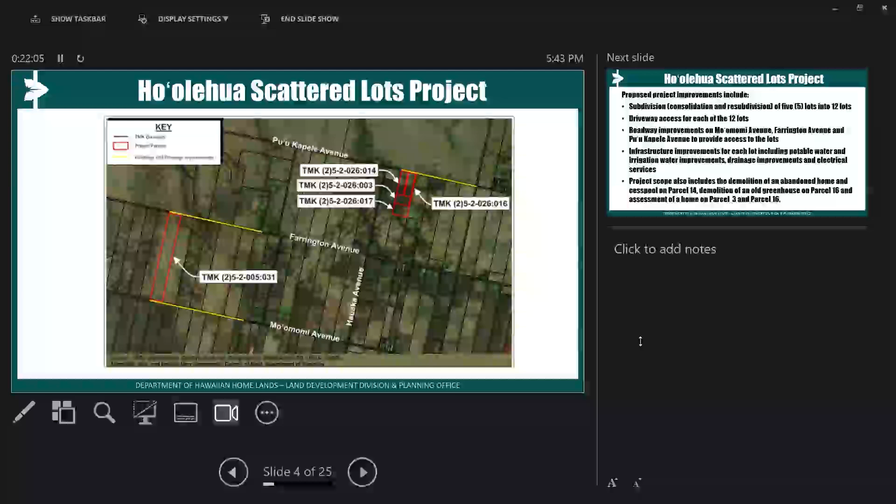Let's go back one to the map. There you go. Yeah, we'll get you handouts and we can also post it to the website. So if you take a picture, we'll make sure we get this posted, you can review it later. All good?

So again, what's included here? We're looking to subdivide the 5 lots into 12. You're going to have driveway access for each of those lots, along with other improvements along the street, really focused on access to the lots. What kind of infrastructure improvements are we talking about? Potable water, irrigation water, drainage, electrical - everything you would need to support a home there.

So again, what's there right now? What already exists? The scope of the project includes demolition of an abandoned home and a cesspool on parcel 14, an old greenhouse on parcel 16, and assessment of a home that's currently on both parcel 3 and parcel 16.

Again, it's a map of what both of those areas are going to look like once subdivided. You guys see that in the back, okay? I see some people taking pictures - again, this will be posted, so you'll have a chance to look at it in greater detail. Okay, next slide.

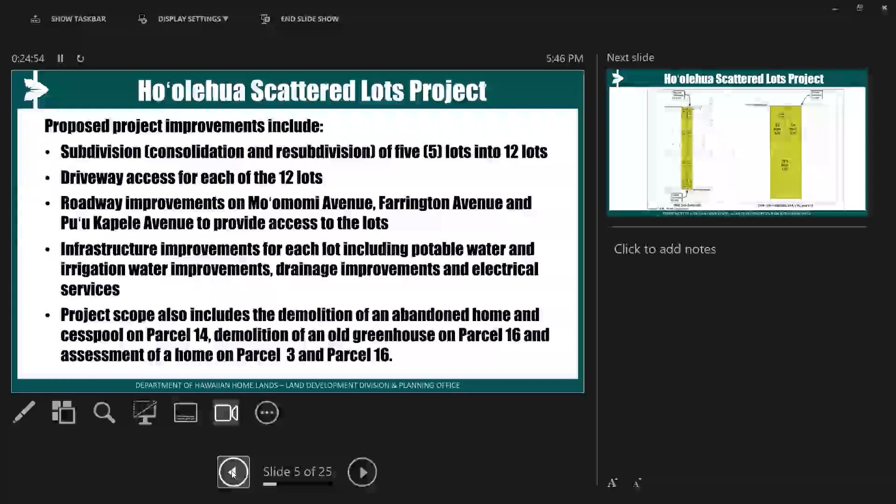And again, the lots are currently vacant right now, with the exception of those structures I mentioned before on parcels 3, 14, and 16. Structures are operating - would you go back, Nancy, to the previous 2 slides? I'll come back to this for you, Dickinson. Because we have that last point there - we're talking about an abandoned home and a cesspool on parcel 14, an old greenhouse on parcel 16, and then the home on parcels 3 and 16 right now. So when I said structures, specifically that's what we were talking about.

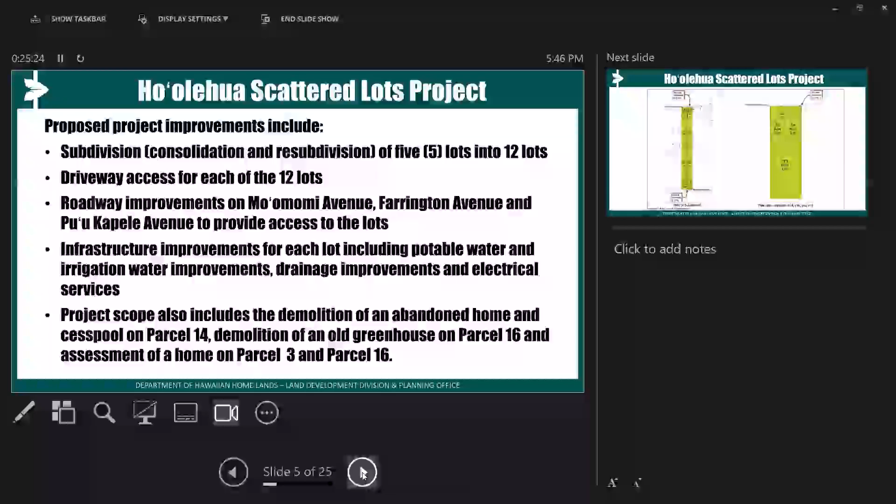So these were lots from other families that gave it up and gave it back to the department. They are not leased. Did everybody hear that question? Okay.

So if you choose to build a home, being the beneficiaries, an individual wastewater system will be needed. Potable water improvements will be constructed if the use of the land is to include a home - so if you choose to build one, those potable water improvements will be constructed. And then agricultural water improvements will also be constructed for farm use and agricultural use.

So again, I know there's a lot of text and I'm trying my best not to just read straight from the slides, but this is really important. When we were preparing this presentation, we knew water was going to be a topic everybody was really passionate about, so we want to make sure we're sharing the information you all are looking for. Potable water for those 12 lots will be provided from the Ho'olehua water system, owned and operated by DHHL, coming directly from the Kualapu'u aquifer. If new water meters are needed, those will be provided for each lot as well. So again, that's potable water.

As we're talking about agricultural water, that water is coming from a different source - the Moloka'i irrigation system, provided by the State Department of Agriculture. Another question came up: is there existing connection? Yes, there is existing connection to the Moloka'i irrigation system in the roadways fronting those parcels - specifically Mo'omomi Avenue, Farrington Avenue, and Pu'u Kapele Avenue. The Moloka'i irrigation system connections will be installed if they don't exist, and there's capacity for agricultural water for all 12 lots.

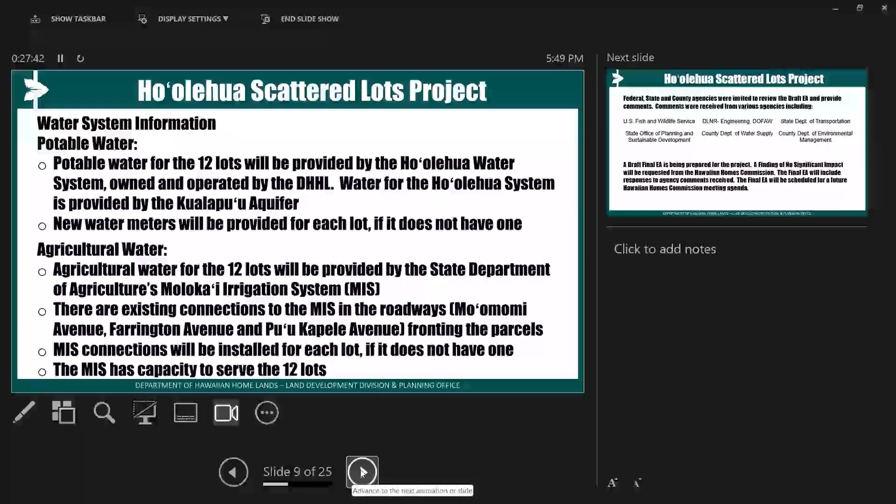So again, what am I specifically working on? Again, with Munekiyo Hiraga, this is draft EA. And Dickinson, we had a chance to explain that a little bit more to you earlier, right, about what that is. But as we're preparing that as part of this project, these are some of the agencies, both at the state, federal, and county level that we went to talk to already: U.S. Fish and Wildlife Service, DLNR, State DOT, State Office of Planning and Sustainable Development, the County Department of Water Supply, and the County Department of Environmental Management.

So right now we're preparing the draft final EA for this project. And what we anticipate there, what we're requesting from Hawaiian Homes Commission, is going to be a finding of no significant impact of this project.

I wanted to say that your comments are also going to be included in the final EA, not just agency comments. That's a great point, and that's why it's really helpful to have everybody here. You know some of those green cards, I don't know if you had a chance to grab them, they're in the back. But share your questions, share your comments. It's going to be my job to make sure I put it all together after this meeting as I'm preparing a summary. So I'd really appreciate it if you shared your comments and questions, because it won't just be us going to those agencies. We're also going to include your comments and questions as well. So I appreciate those that spoke up already, that's really helpful.

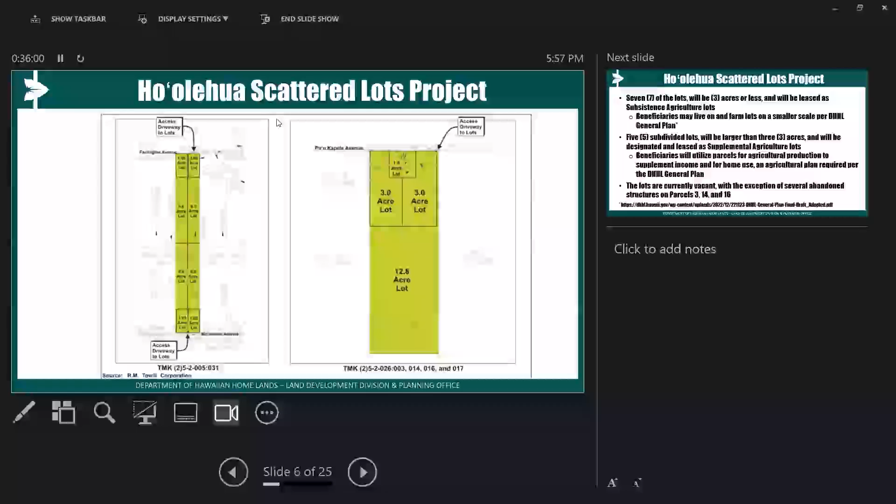It's cleaning that up and offering it to people on the waiting list. It won't really impact traffic, and it won't affect the water supply. We're actually cleaning up cesspools, which helps with the wastewater situation, so it's a win-win. It brings people back into Ho'olehua and hopefully creates more small-scale agriculture so people can feed their families, maybe have a little extra to share, and make a little money at the farmer's market. So that's where we're at with this project from a planning perspective.

Is that lot hers? It's possible. The house I spoke of was built in 1996 and abandoned in 2001, so about 5 years. It had a big greenhouse to the right. So that was a brand new house — I don't know why you guys didn't give it out in the first place.

Yeah, there's usually a process our Homestead Services Division has to deal with. We're trying to get better at doing that.

Thank you, Lokahi. Again, my name is Roy Ire from Hawaii Engineering Group. On behalf of Department of Hawaiian Home Lands Land Development Division and Planning Office, I want to thank you for being here today. I'm here to talk about the Kalaniana'ole Hall. As you guys probably have been aware of, it's been locked down for a time being. This is the hall that is right across the street from us. I want to go back a little bit, talking about the history, what had occurred with the hall itself.

The department has spent a lot of money repairing the structure several years ago, and once again, the building is pretty much dilapidated due to termite infestation and deterioration of the property. So we're trying to look into several different options for what we can do to the hall. We looked at rebuilding it, and several different options, maybe doing some minor repairs, but there's so many different things that came into play. Can you go into the next slide, please?

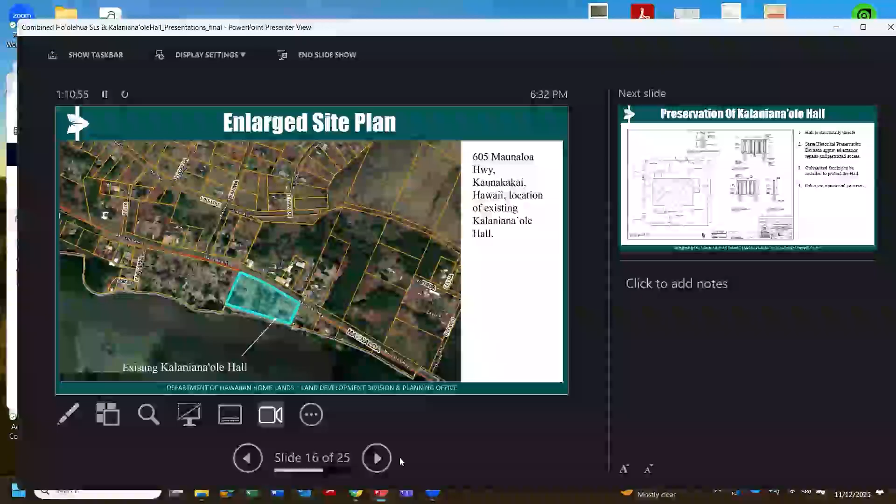When we looked into it, we consulted with the State Historic Preservation Division because we understand this building has historical significance. So rather than going through the process of rebuilding the hall, which involves the State Historic Preservation Division again and other environmental concerns, we took the option of preserving the hall as a historically significant monument and securing the building. I'll explain the reason why we took that option.

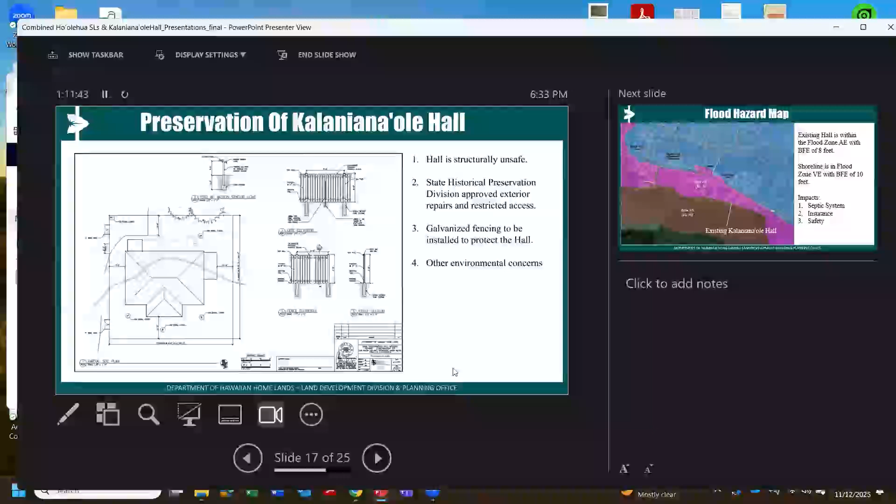Due to some environmental concerns, the existing hall is currently sitting in a flood zone, the AE flood zone with a base flood elevation of 8 feet. If we were to rebuild or do some reconstruction to that building, we'd have to elevate it 8 feet plus 1 foot to keep it in compliance. If we don't do that, the building will fall into non-compliance with the flood regulation monitored by FEMA, which means your insurance rate could possibly double.

The other thing that needs to happen is we need to replace the septic system with the IWS system, because that building currently sits below what they call the underground injection control system, or the septic system that sits right above the water table. Should there be any kind of leak, it could contaminate the water table. And the third thing is safety because of a flood hazard.

The climate committee looked into the future of what could possibly happen, and they're talking about sea level rise in the future. I'm pretty sure you guys have heard about that. This mapping was put together by federal interagencies like NOAA, USGS, and the Corps of Engineers, which Maui County utilized to plan for the future. The yellow color zone shows the potential impact of a 3.2 foot sea level rise.

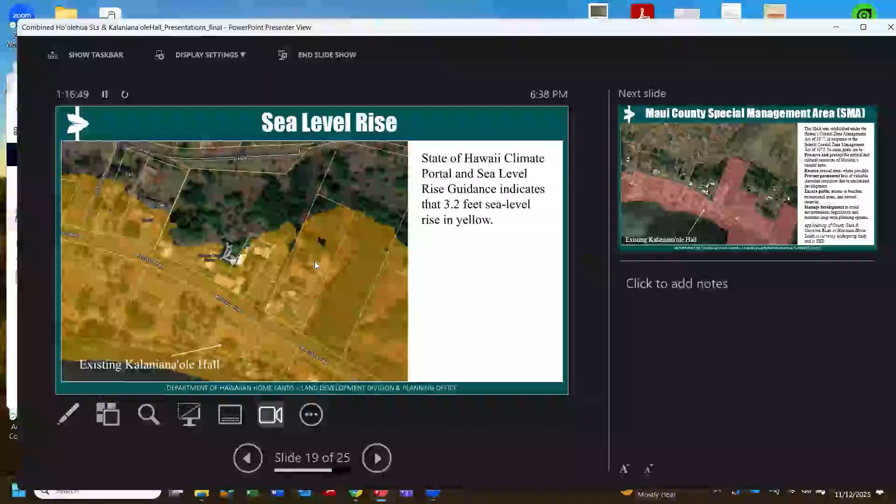So we're able to do a lot with this lot and benefit these churches underneath. The ideal, again we're very pre-planning, but ideal would be kind of parking in between so it can service the community hall up on the top portion as well as these guys on the bottom.

In the churches, but again, early planning stage, we're looking for additional funding. We have to go lobby for this money to do this brand new hall if we want it. Right now, we want to preserve the existing hall. Again, like Roy was saying, the price to renovate that one and repair that one would be the same as if we were to build a state-of-the-art one up there in a safer situation for everyone to access. So that is the plan we have going forward.

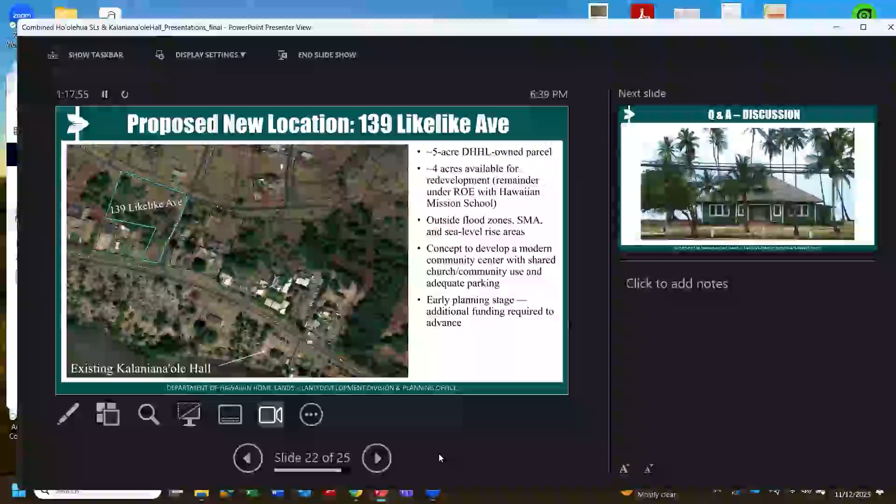Thank you, and that will bring us to questions. Guys, I'm listening to you folks, I'm going to have to take this off, tell you the truth.

The community, if you knew the history of the building, it was dilapidated, completely down. Community got together as a private nonprofit so we could raise some money, because Hawaiian Homes and the lessees, or the person who had a license, the organization, could not do what they needed. So it took us close to $3 million. So when us as a nonprofit had finished with our license, I approached the department if they could open it up to a homestead association to manage it.

Department tells me no, we gonna manage it. But from then to now, I forget how many years, they did not do a damn thing but let it sit there and dilapidate. Shame on the department, because people need to know that.

Because now you say you have bad stuff, that's one of the worst things that ever happened. And your facility manager, Rodney Lau, the late Rodney Lau, who retired after 30 years with the department, I happened to connect with him, took him and looked through the windows, looked at the book, and I said all my gripes about the department.